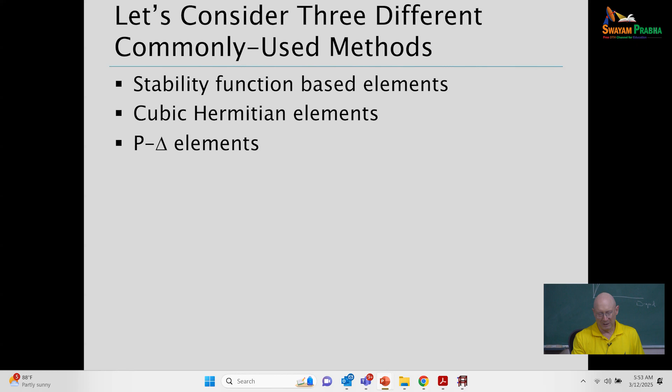So stability function element, what is it? Basically, in terms of the development, you set up the governing differential equations for a beam-column member. A typical stability function based solution is based on the assumptions that the response is elastic, typically done with a prismatic geometry of the member, using Euler-Bernoulli kinematics - so no shear deformations, plane sections remain plane and normal to the axis of the member.

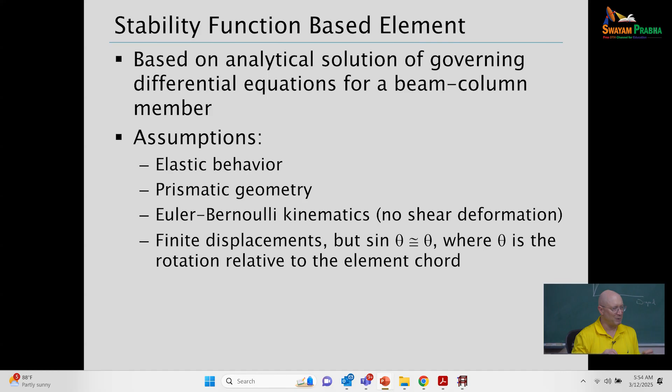We're considering finite displacements with the stability function based element, but basically if we're looking at a rotation, we're talking about a planar solution - mainly focused discussion on planar analysis here. Some comments about 3D: if your rotation theta could be large in general, the development is such that it's based on the assumption that sine theta equals theta, for a rotation of the element relative to its chord between its ends. There have been three-dimensional versions of stability function elements, but I think those are even more rare.

The plane frame analysis version, we typically start with a matrix relationship that relates to axial force - that's just the axial shortening, E times EA over L is our axial force, nothing special there. But the other 2x2 parts relate to the moments, where we have stiffness coefficients EI over L - notice the script L here, that's an element length - and we have coefficients either SII or SIJ, with the equations for SII and SIJ shown below.

How do we get those? We're basically solving the governing differential equations of this problem based on Euler-Bernoulli beam theory elastic response. A term prominent within these coefficients, SII and SIJ, is often labeled kL, or sometimes written as kappa L. This lowercase k is not an effective length factor - it's a different k. In fact, little kL is basically the square root of P over EI times L. Or if we manipulate that, it's actually pi times the square root of the applied axial load on the element over PE script L. And PE script L, same notation we've been using the last couple of days, means pi squared EI over the element length squared.

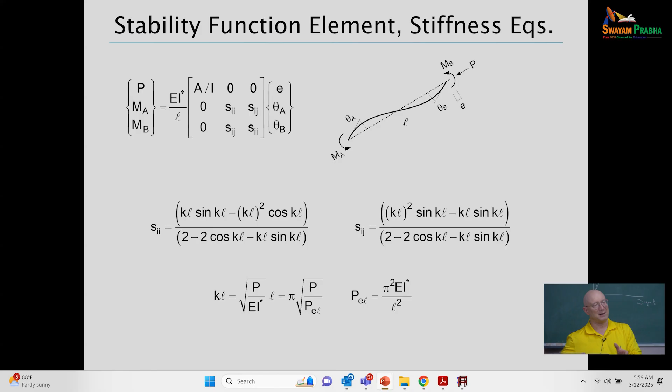There's similar things we can do that are a little more complicated, where we have to say, okay, here we've got essentially deformations, E, theta A, and theta B, and I want to relate those to, if I go to the next slide, a general global, but in a local coordinate system tied to the current element orientation. What's the global rotation? What are the global axial and shear displacements at the ends? And so that's really just a kinematic analysis to get those relationships.

So if I use, and those are very symbiotic, if I incorporate both the equilibrium relationships and the kinematic relationships that tie all these together, I get the 6x6. Once I also account for an effect of P large delta that has to go in with all this. So that's a very hand-waving explanation of how we get from one to the other.

My approach here in this lecture is not to look at how we develop these elements and the details that are essential to the development. It's more of, okay, these are the elements we encounter as practicing engineers. How do we use them? How well do they work? How do we make sure they're working properly?

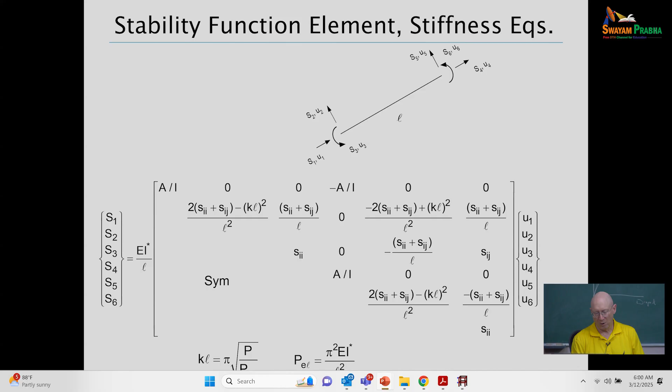So again, the KL is essentially pi times the square root of P over PEL, and PEL is pi squared EI over L squared. All right, so this plot is fairly informative in terms of what's going on with the stability function element.

So those coefficients that I showed you a couple slides back, SII and SIJ, those depend on the axial load level. So let's take the most basic case. In the limit that the axial load approaches 0, then for one of the coefficients, SII goes to 4, SIJ goes to 2. Well, that's just the standard 4EI/L and 2EI/L that shows up with a linear elastic response of frame members. But as I increase the axial compression, those coefficients are changing.

So what I'm showing you here is one example of where I'm pointing to a location on the plot. The values of the stability functions are on the vertical axis. Just the ratio of P to PE is on the horizontal axis. And so if I apply an axial load P that's equal to PE, P over PE equal to 1, what have we got? So basically the red curve goes to here, the blue curve goes to there, and interesting, that's the point where those two curves cross.

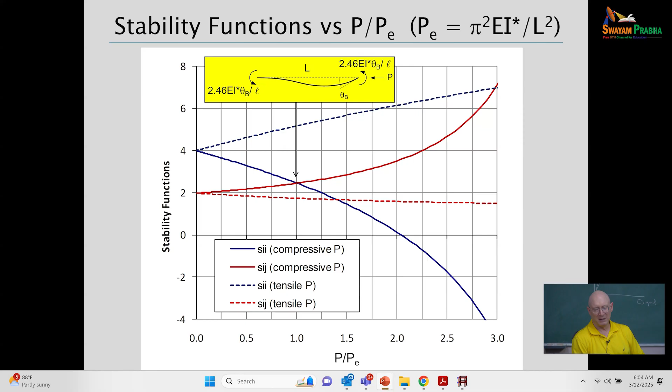Those blue and red curves are showing you how those coefficients are changing, and that's essentially a rigorous solution. It's a very accurate representation of what's going on, even with a single element for a member.

Now, cubic Hermitian, in this case, is a finite element based solution. The solution is achieved by starting out with a displacement function for the element. We're going to represent the element response by a cubic displacement field along the length. The true analytical response from the differential equations is not a cubic when we have axial force on there, so it's an approximation. But the whole mantra of finite elements is: yeah, it's always an approximation, but you need to use enough elements and you'll have a good solution.

So the matrices we get - you get two matrices when using a cubic Hermitian element. The first matrix is what engineers often learn in a first matrix structural analysis class. Here I'm showing just the fifth column of the element matrix for KE. This is called the elastic stiffness of the element. The fifth column corresponds to a displacement of U5, so what are all the forces that are produced for a displacement of U5?

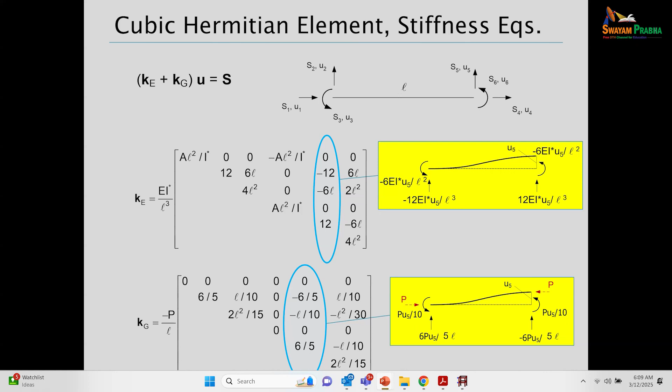So if you take a minute to stare at that, look at it as a free body diagram - that's kind of what it is. You can consider the red dashed P arrow if you wish, or not. Do you have equilibrium? Let's sum moments about the left-hand end in that free body diagram. What do you see? You have a clockwise moment of 6P times U5 over 5.

And then a counterclockwise moment of P over 10 times U5, and another one at the other end. So you can say, wait a minute, it's not in equilibrium. Oh, but yes it is, because what it's doing is saying, well, if I have this displacement U5, then the axial force location is shifting. So now I've got an extra moment of P times U5. If you include that in writing out your statement of moment equilibrium about the left-hand end, you get zero. But that's equilibrium in the deflected geometry.

So that's what's going on with the geometric stiffness matrix here. This is representing both P large delta and P small delta effects at the element level via the cubic displacement approximation. So the cubic displacement approximation is giving me some bending displacement relative to the chord.

The third element, P large delta, is basically the same elastic stiffness as what we just looked at, but we're going to do a different KG. I just realized as I'm saying this - I thought I fixed it here. Oh, we're good. You were good. I think in what you have and what I posted on the Google Drive, I'm circling the wrong columns.

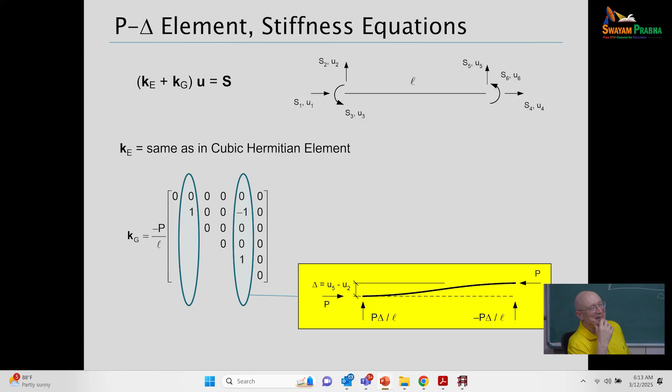Yes sir, in the Hermitian beam element, you said it will consider P-small-delta effects as well. Yes, it does consider P-small-delta. Usually the displacement estimates at the nodes are accurate, and in between we are interpolating. Is it because the cubic function is able to capture the bending relative to the chord, so you're getting some representation of the P-small-delta? But the internal loads like UDL and so on will be approximate, not exactly correct, right? Yeah, if you've got element loads on the interior, there are other things going on.

On the first day I showed one recommended way that's a simple way to set it up if you're the software provider or developer, but there are many ways to try to get an accurate estimate. From what I've seen out there, looking at what is displayed graphically, I don't see software providers doing anything other than a first order analysis approximation between the nodes, given what would be second order forces from the second order analysis at the nodes. Between the nodes they don't consider any P-small-delta term, they simply interpolate with the functions.

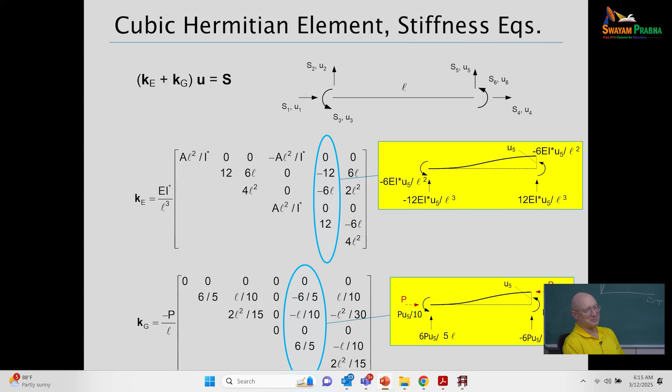Okay, so this problem is basically a cantilever. Things like a cantilever, or fixed in rotation, that's when we get the most bending relative to the chord, and so the largest P-small-delta effects.

So I'm not showing you the derivation of these equations, but if I go to theory of elastic stability and do a differential equation solution for this problem, I can derive exact moment amplification and displacement amplification formulas, and we can write those in terms of the quantity lowercase u that you see here.

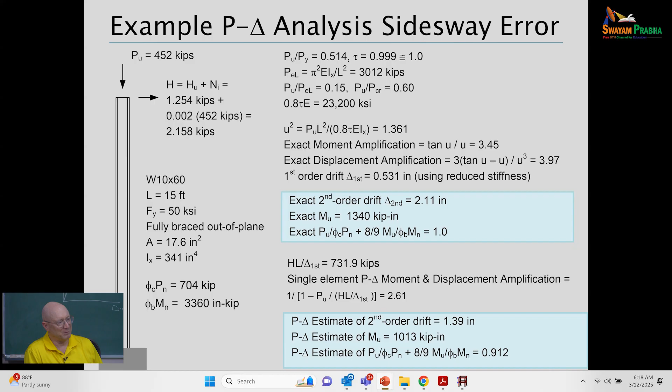All right, so now the next thing I'm showing you is, what if we only do a P-large-delta analysis here? I'll make a statement: if we calculate B2, which we looked at the development of yesterday, and take RM, that factor -- remember RM gives some effect of small delta on the large delta.

If we take that equal to 1, we've essentially not considered any P-small-delta on the large delta. It's a P-large-delta B2 approximation. That's what I'm doing here in the lines above the blue highlighted box. I'm saying if I calculate B2 for that, taking RM equal to 1, instead of a moment amplification of 3.45 and a displacement amplification of 3.97, I get a single amplification factor of 2.61.

Again, this is kind of an example. It shows up in the commentary to the AISC as a worst case of where you have to consider P-small-delta. You can't just do a P-large-delta with a single element on this column.

But what's the ramification of just doing P-large-delta here? That's in the bottom blue box. If we just apply the amplification factor of 2.61, we'd get 1.39 for the drift, or the lateral displacement. So our displacement would be off by 34%.

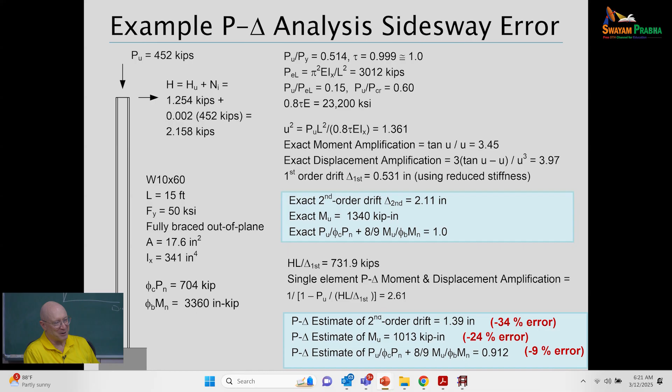So you can say, yeah, I want to do better than that, but the sky's not falling because I did a P-large-delta analysis. But that would be with just a single P-large-delta element for the entire length of the member, which is often what engineers may like to do.

If you talk to, say, the engineers at RISA, and you say here's a problem, they'd say yes, P-small-delta is important in that problem, you need to use more than one element. The graph here is an attempt to illustrate that.

If you take this member and subdivide it into, what do we have here, six elements, it's a P-large-delta approximation, but you can see that at the element level, there's not much large delta.

Another way of looking at this is you could think of modeling the P-small-delta effects in any given member by a bar chain attached to the member with an axial load on it, so the bar chain moves, and I'm starting to get these destabilizing forces thrown into my member. If I use lengths of the bar chain that are very small compared to the length of the member, I'm still going to get a good solution.

So that's the key if you're using a code with P-large-delta elements: as long as you have enough elements, you're good.

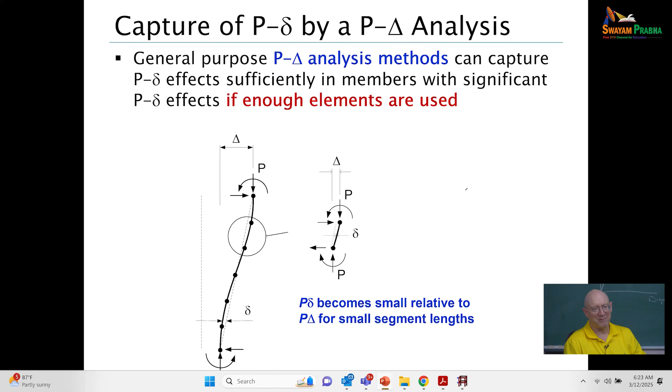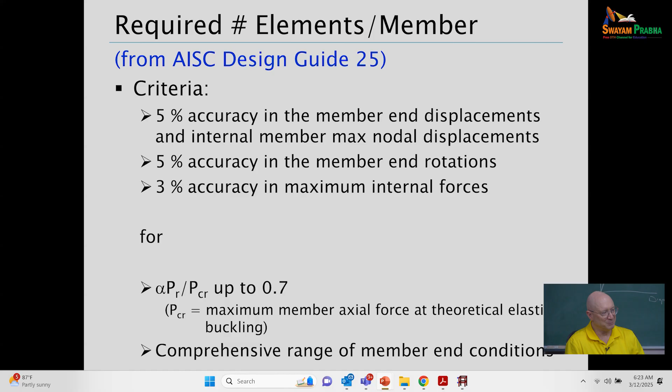So how many elements? Some recommendations relate to aiming for design to get 5% accuracy in displacements and rotations, 3% accuracy in forces, for applied load levels at strength up to 70% of the elastic critical load. Usually we don't get any closer than that in a practical design. And again, we're going to relate to things with different length terms.

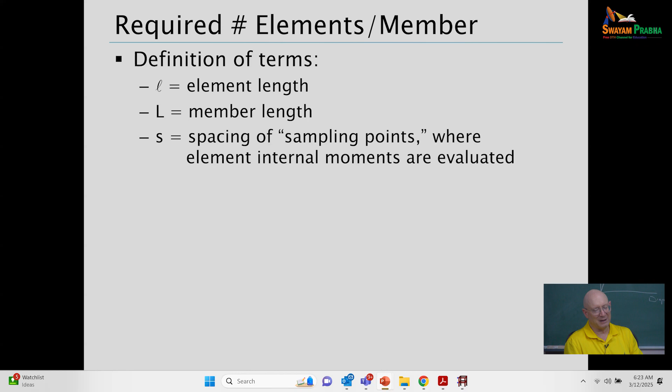So script L is element length, capital L is member length, S is the spacing between sampling points if we're going to try to sample and get internal moments between nodes.

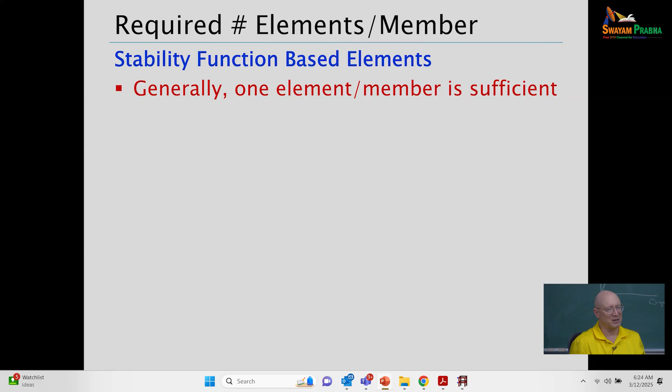So how many elements do we need if we're using the stability function based elements? One. You've got a differential equation solution, at least to the extent that you don't have significant shear deformation—it's an Euler-Bernoulli based solution. You're getting a rigorous solution, and we're not solving mechanical springs that have some huge displacement in them. Sine theta is equal to theta relative to the chord. So yeah, one element is good enough.

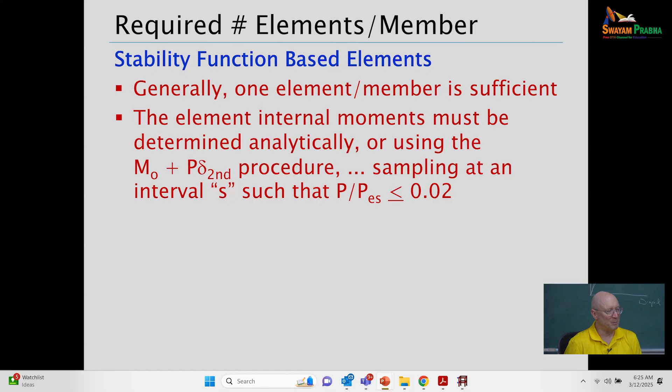But again, what goes along with that is, okay, you used a very coarse discretization of your structure. If you have a case where the internal moments are larger than the end moments, we've got to deal with that in some way. I showed you a suggested way that a developer or provider could implement something to get those moments. Or in design, we have this very coarse approximation of B1, which a few of us were talking about here that we looked at the first day, that we apply at the element level to make sure we're covered.

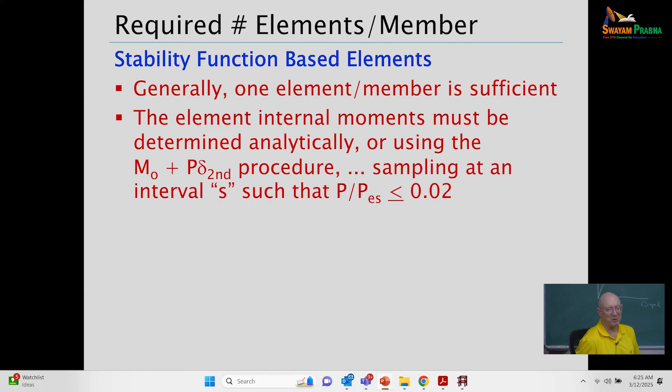Cubic displacement elements - so Mastan is cubic, FastTrack, E-tabs if you use the right menu options, GT Strudl, Larsa, SAP, RAM elements, Consteel. Those are at least a lot of the programs I'm familiar with that all have cubic displacement based elements in them, or cubic Hermitian elements.

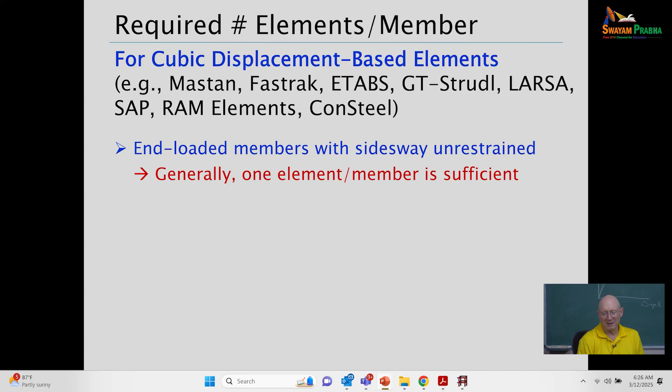So in this case, if you have something where you have a column, say, that has loads coming into it from the rest of the structure at its ends, but the rest of the structure really isn't doing much in terms of restraining this member's side sway - in fact, maybe it may be destabilizing the member - and so the member is kind of on its own for the most part in terms of resisting side sway, then one element is good enough.

If you've got a case where, for whatever reason, the other parts of the structural system may be helping this member by helping to resist its wanting to sway to the side, then it's wise, if you are getting any sense of that, to use 2 elements to capture your P-small-delta effects accurately.

Well, that's pretty coarse, just 2 elements. But even there, if the axial load level P over PE capital L is less than 0.17, one element generally is going to work just fine. Again, the caveat is to avoid the need to have to do something to capture internal second order moments between the nodes and get an approximation there.

Okay, well, we would just use a P over PE script L equal to 0.02 or less than or equal to 0.02, and that same goes with the stability function based element as well. If you use an element discretization such that P over PE script L is less than or equal to 0.02, you should be good both with a global solution.

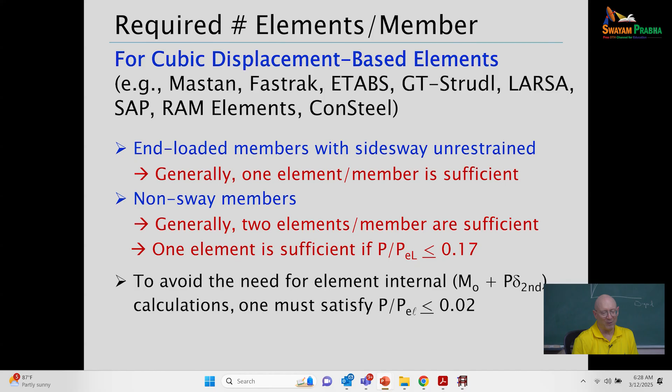Clearly that's a much more dense mesh than the minimum required that I'm showing you here, and you're covering things so you can say, yeah, I don't have to worry about having to do some P-small-delta estimate between the nodes of my analysis solution.

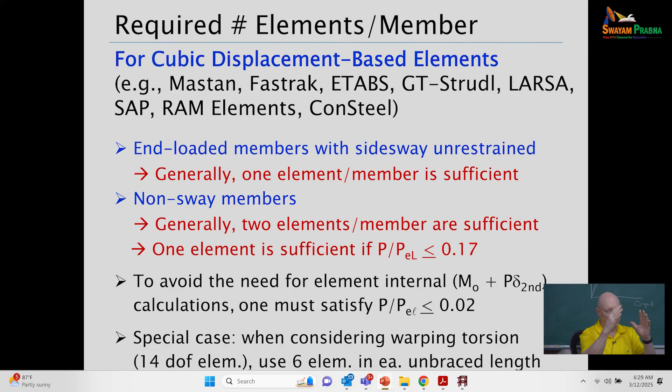Now these comments are all related to planar analysis, but everything I showed you in Consteel for out-of-plane buckling, we could do out-of-plane buckling with a 3-dimensional solution, a 14 degree of freedom element. If we're starting to get into things where we're doing a 3-dimensional solution involving torsion, either a planar solution that buckles out of plane or a spatially loaded member, the recommendation is you really should use at least 6 elements in each unbraced length - in between every position where you've got a member connected to other stuff, I would use 6 elements.

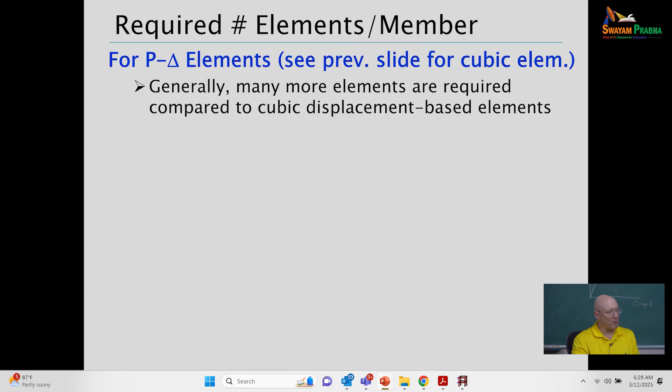Okay, what about P-large-delta? I think there's often confusion thinking about recommendations for cubic elements, but P-large-delta elements generally require much denser mesh. The simplest rule that works very well is use P over PE script L less than or equal to 0.02 again for this, for P-large-delta. If you do that, you're essentially assured that you've got enough elements.

So what does that imply in general? As an example, suppose we've got 4 equal length elements representing a beam column, and say P over PE script L is equal to 0.02. Well, that means I can handle a P over PE capital L of 0.32 - 0.02 times 4 squared, right?

Or let's say I'm using 8 equal length elements with P over P script L of 0.02. Well, 0.02 times 8 squared is 1.28. So I can get a solution there - I'm confident I've got an accurate solution in that case. If I've got loading that exceeds PE capital L up to 1.28, I should be accurate with 8 elements.

Now you could even go larger, but if you keep pushing this, you say, what's the worst I could possibly have? Well, that would be needing to handle a P over PE capital L of 4, so that would take quite a large number of P-large-delta elements. Again, for your second order solution, though, we're usually not getting closer than about 70% of the Euler load, because you always have some bending - you've got phi factors or partial safety factors on even your elastic buckling response, so you're not getting that close to the theoretical elastic buckling load.

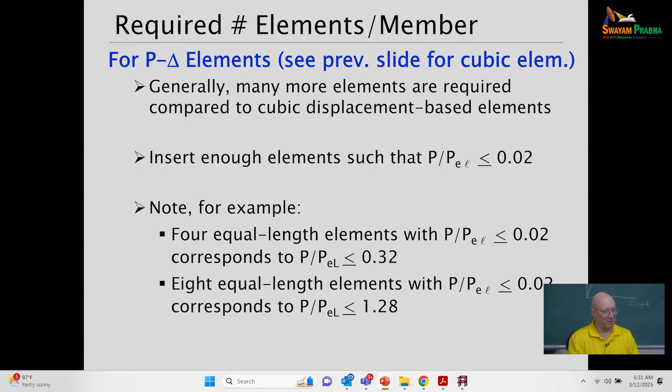There's one other thing to show you that is something that Dr. Shankar Nair essentially brought to the committees at AISC, and we put into the commentary of the specification. Let's consider typical steel buildings - Shankar would say that generally the ratio of your axial load taken by moment frame columns to your axial load in the story that's taken by the entire story, usually that's going to be less than 1/3.

Where would he have a design with a steel framing where this is larger than 1/3? Why? Moment connections are expensive, and you're typically going to have a lot of your connections of floor framing to your columns as basically web type connections that don't transfer significant moment. We idealize these as pins for the analysis.

So if you have PMF over P story less than or equal to 1/3, and if B2 is less than or equal to 1.7, then you can basically argue that your error in neglecting P small delta effects on the large delta is generally less than 4%.

Now we can show a derivation of that by using our equations that we discussed yesterday for B2. So we have the RM factor in that equation. If PMF over P story is 1/3, then RM would be 0.95. So now let's calculate B2, but let's calculate it without an RM. That means we're basically doing a B2 that's just handling P large delta.

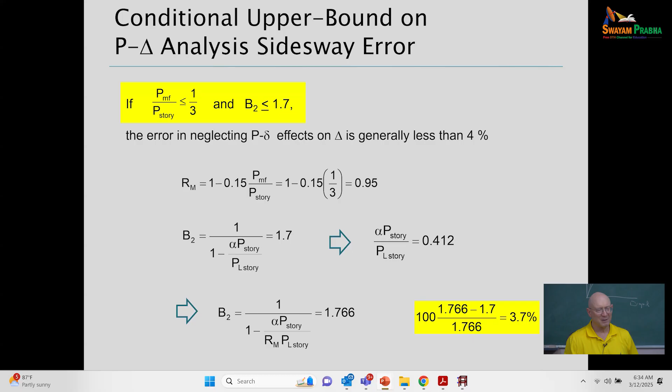So Shankar would say, hey, he doesn't have a problem using RISA and getting his drift and his overall lateral moments in a frame based on P large delta in RISA. And then if he has a situation where he needs to check non-sway moments and non-sway B1, or P small delta amplification, back to this, but with that being on the length, total length of the member L, where he's just doing a P large delta analysis with one element for every column in the frame, and he would show this and say that there's no problem with that.

He may have a conservative estimate with this way of applying B1, but so be it. For most steel building frames, the B1 factor is often 1 anyway, and is not much larger than 1 in most situations.

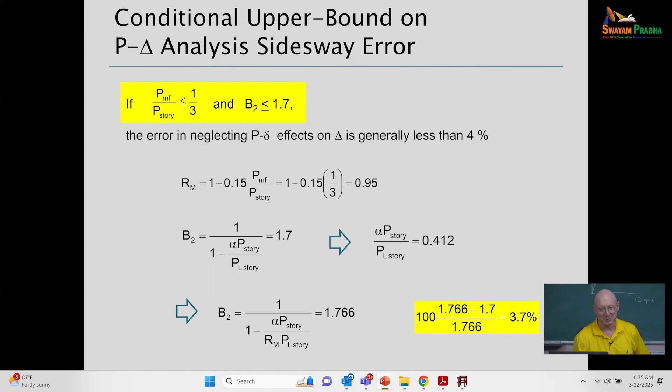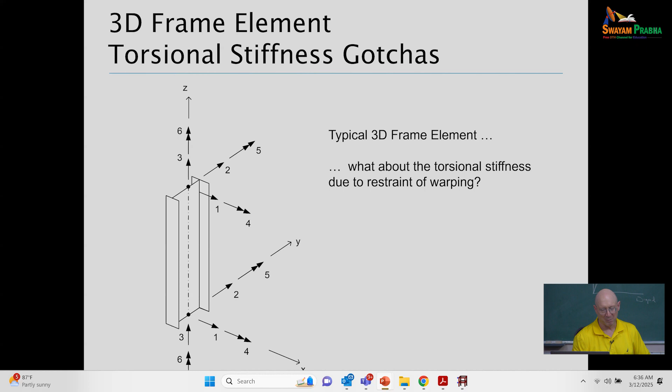Last thing I want to highlight is if looking at three-dimensional analysis, we can have a 3D frame element, and in software like Consteel, we have a 7th degree of freedom at each end of this element rather than just between 3 translations and 3 rotations. So what's the importance of that? This is a little first order analysis example to try to highlight the importance of that 7th degree of freedom at each node, which basically allows us to model warping in the frame solutions.

That's the warping of the cross section, the cross bending of the flanges. And that cross bending of the flanges is really the predominant resistance to twist in most I-section members. We also have the St. Venant torsion, but the St. Venant torsion is a relatively small contribution.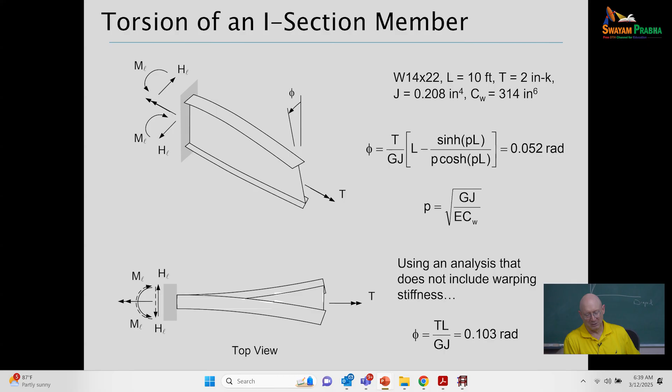If we neglected the cross bending of the flanges and we just considered what we refer to as the uniform torsion or the St. Venant torsion within the member, then the twist would be equal to TL over GJ. The St. Venant torsion constant, capital J, is very small here. Oh, my, the rotation is essentially double.

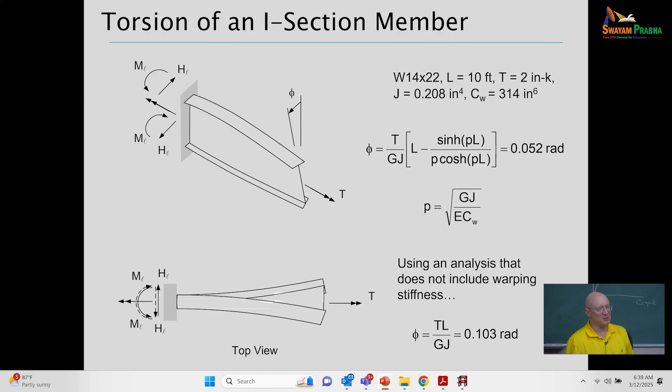So this is a very simplistic illustration using a first order analysis of warping rigidity, which is very important when it comes to twisting in these types of structures. And so that's one of the highlights of Consteel - everything in Consteel is based on including that warping.

One of my senior colleagues at Georgia Tech a few years back, essentially the principal with GT Strudel, was giving a seminar and complaining about how the AISC spec was really bad because he had an engineer trying to design a boiler building, and GT Strudel was having a lot of trouble because he was designing into a range where it was basically saying, hey, you've got a big buckling problem here. A boiler building, if you're not familiar with it, is something where the building is basically housing a boiler, so it's a big boiler on the interior.

You have nowhere to brace your columns because there's a big boiler there. They go way up, and you're supporting the boiler from the top of the building. So you've basically got this very long unsupported length of your columns, at least in the direction in and out of the plane of the wall of the building. And that's basically a case where most of the software out there, very few packages at present will actually give you that 14th degree of freedom and give you a realistic representation of the torsional stiffness here.

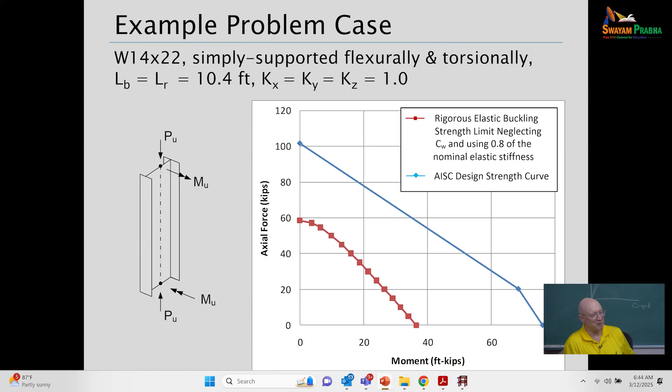The blue curve is basically what the AISC specification would say - that's our strength envelope. So you set up and run your structural analysis, a 3D analysis. You look at this - this member doesn't look too out of the ordinary here. And your analysis comes back failing, saying you've got significant elastic buckling of your members at a very low load. Why? Because you didn't include the warping.

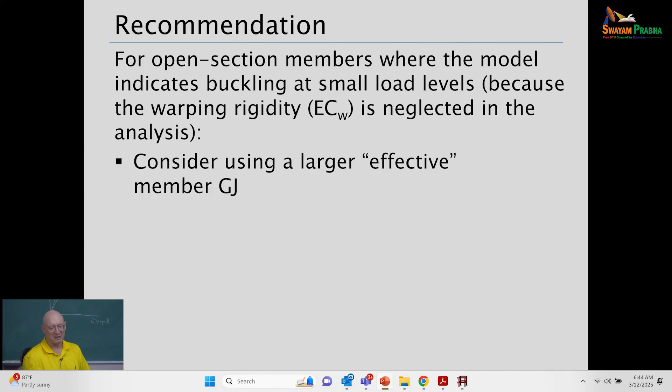So the recommendation in cases like this is that it's wise to consider using a, quote, 'effective member GJ' that incorporates warping. Actually RISA does this, where they have an option where the program's only using a GJ, but they derive an increase in GJ that accounts for the warping stiffness. So it's kind of a backdoor representation of warping that's approximate, but it keeps things out of trouble with problems like I just showed you.

This is also suggested - I do a lot of work in the steel bridge arena in the United States, and I've been involved a lot with design of horizontally curved I-girder bridges. Well, with horizontally curved I-girder bridges, torsion is very important. It's an I-girder, and if you're going to do a grid analysis of such a bridge with just GJ over L, you're going to run into trouble sometimes where you say, why are my deflections so huge? Because you don't have a good model.

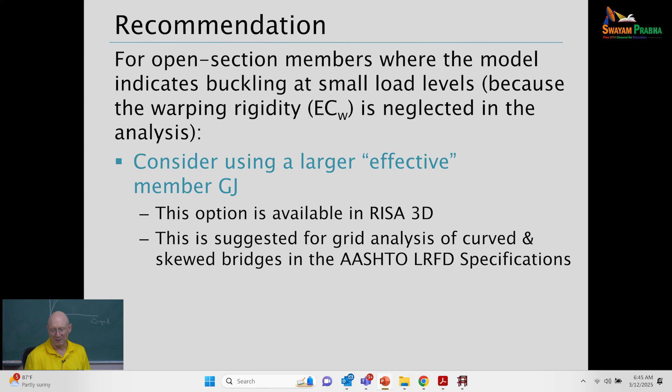So there are similar recommendations in the American AASHTO design standard for bridge construction that say, for grid analysis, you can use - it's a rough approach - an equivalent GJ to get a reasonable solution. Or ideally, if the world had Consteel or other programs like that, the warping is included within the solution, and you've got something that can be used very naturally and very directly for any problem where you've got significant torsion on an I-section member.